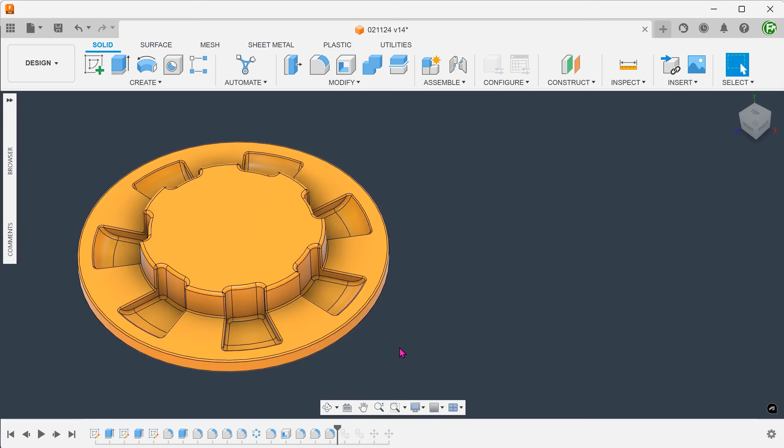Looking at this part, it is quite clear that shelling would play a major role. As always, the first step is to identify the main shape. If we ignore these indentations, this is simply a disc with a cylinder in the middle. So let's start with that.

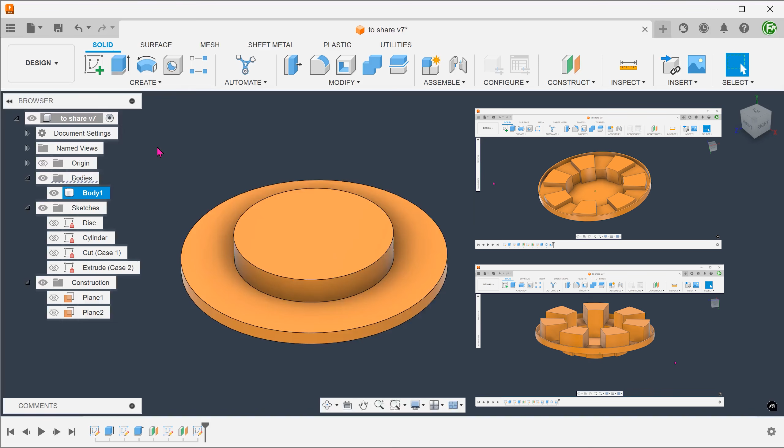For the first example, I'm going to assume that the indentations are flush with the disc. Later, I will discuss another example where they extend beyond the disc. To create the indentations at the top, I have prepared the sketch here.

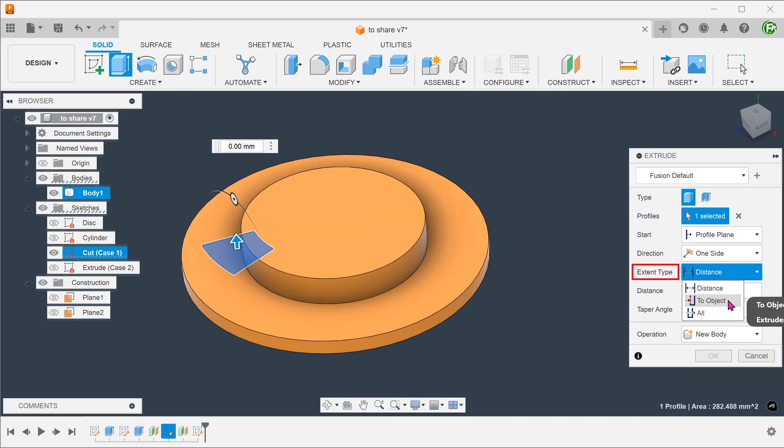Begin the extrude command with this profile. I will be working with a shell thickness of 1mm throughout, so we want to control this cut to be 1mm away from the base. For extent type, select To Object and select the base face. We can introduce an offset from the base by entering a value of -1.

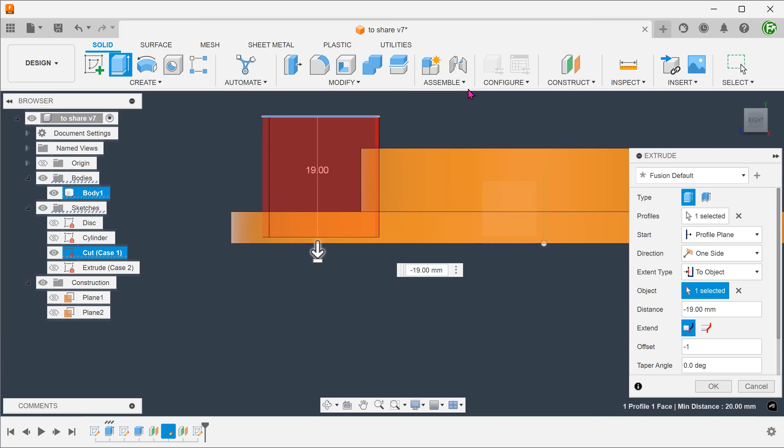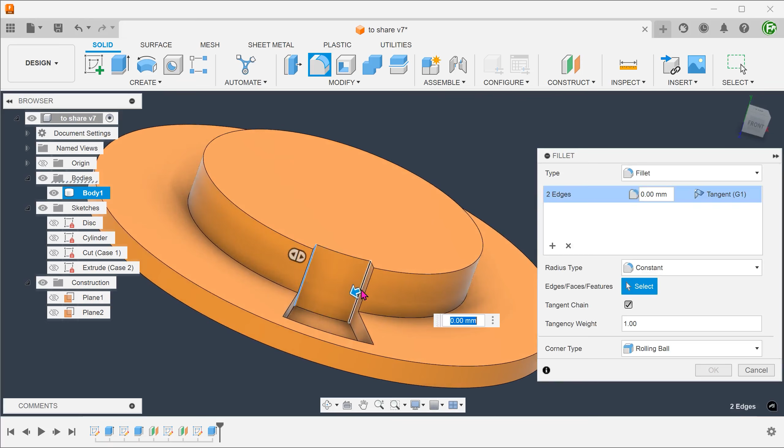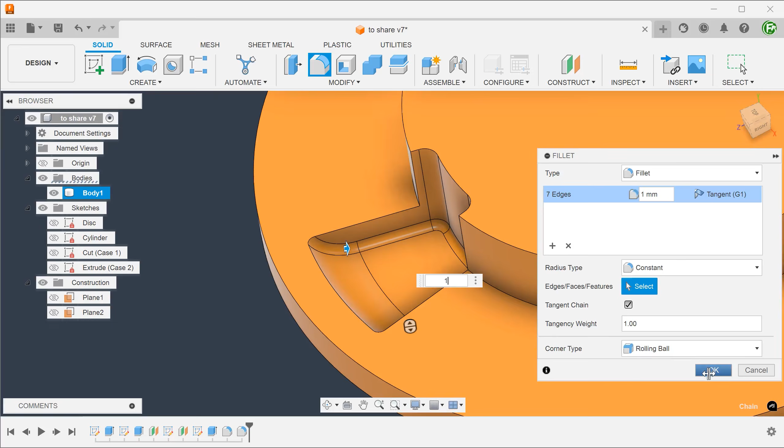Before shelling, we want to add in fillets. With these fillets in place, the shell would automatically adjust the thickness and introduce fillets on the reverse side as well. Go to Modify, Shell. Select the base face. Adjust the thickness.

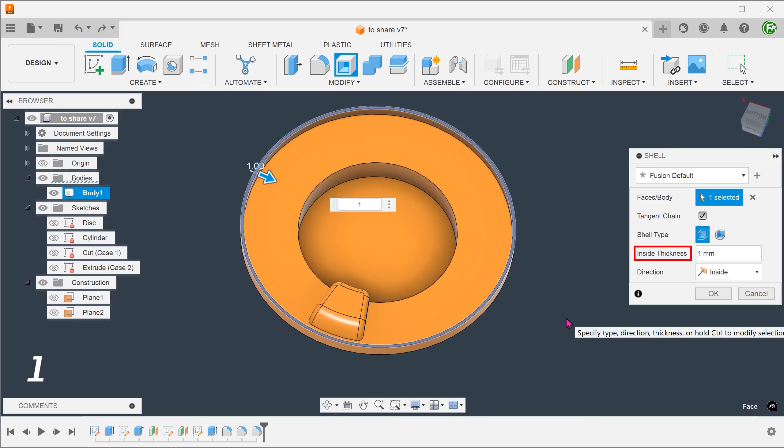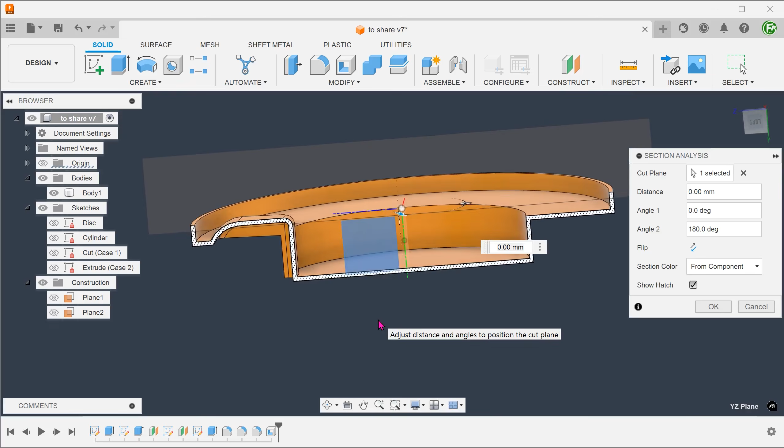So with a simple command, we have created a lip, a protrusion, and a cylindrical cut, all the while maintaining a universal wall thickness of 1mm. At this point, we can split out this portion and pattern bodies. Or we could have also patterned the cut before shelling. I will leave that for you to try. This workflow will be applicable for the case where the indentation is either level with or below the base face.

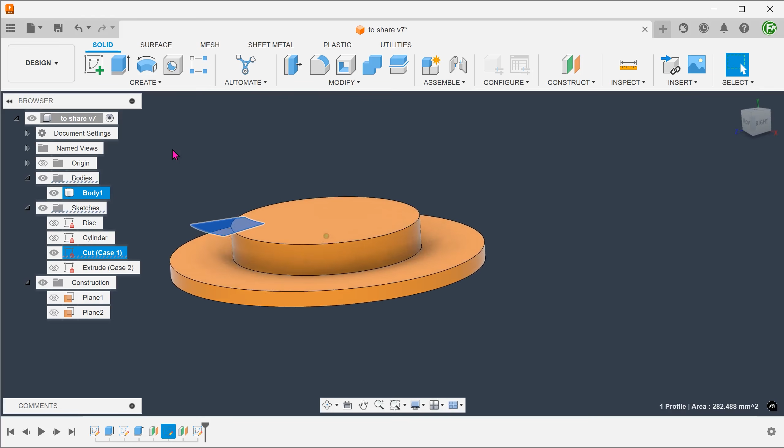Let's take a look at the next example where the indentation exceeds the base face. In this case, it will be very difficult to use the same sketch to make the cut from the top and at the same time build a protrusion at the bottom that extends beyond the base face. For this example, it actually makes more sense to shell the main body first. Go to Modify, Shell. Select the base face and adjust the thickness.

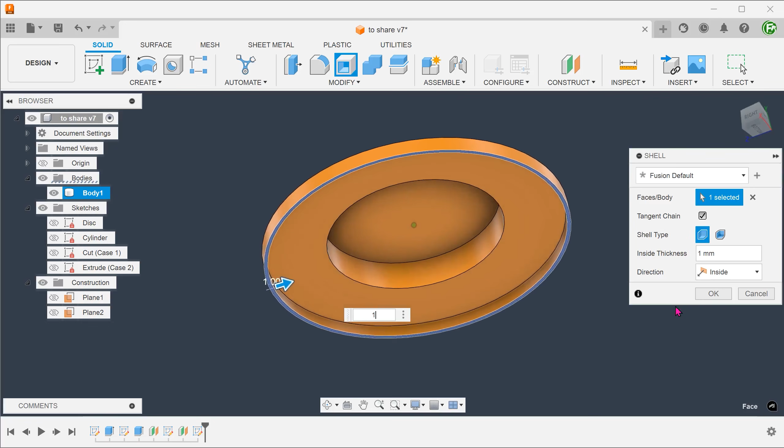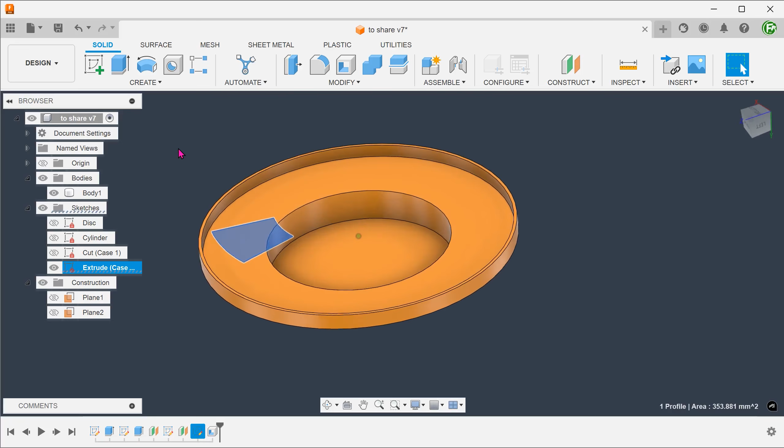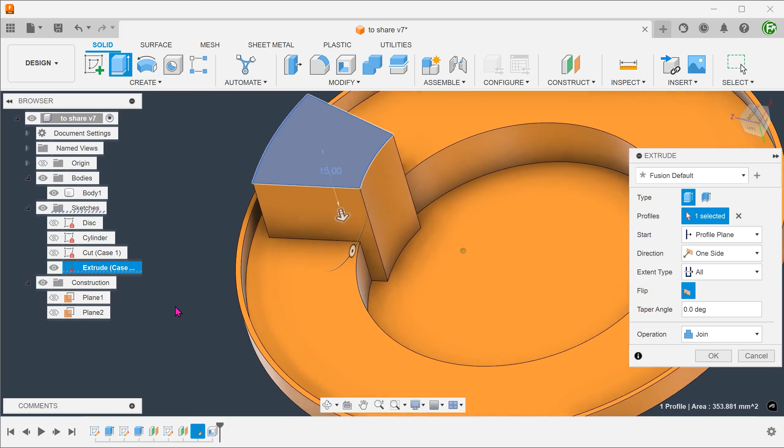I have prepared a sketch here on a plane that is above the base face. Begin the extrude command with this profile. For extent type, set to All. Flip the direction. Set the operation to Join. With extent set to All, the extrude automatically terminates up against any existing faces.

To create the cut at the top, we shall use the shell command. Select these three faces. Adjust the thickness.

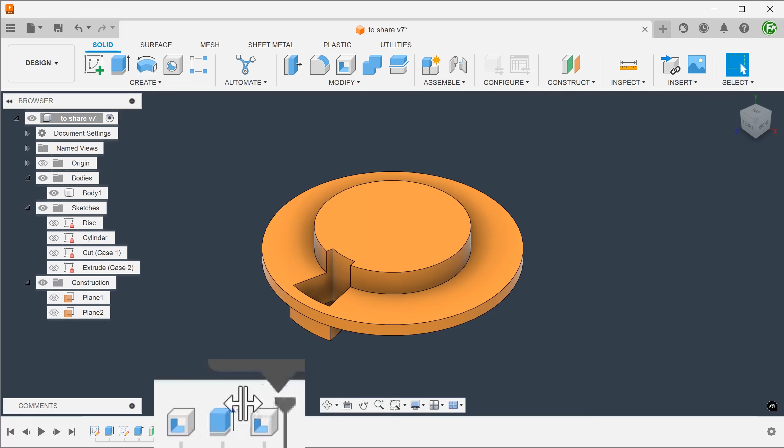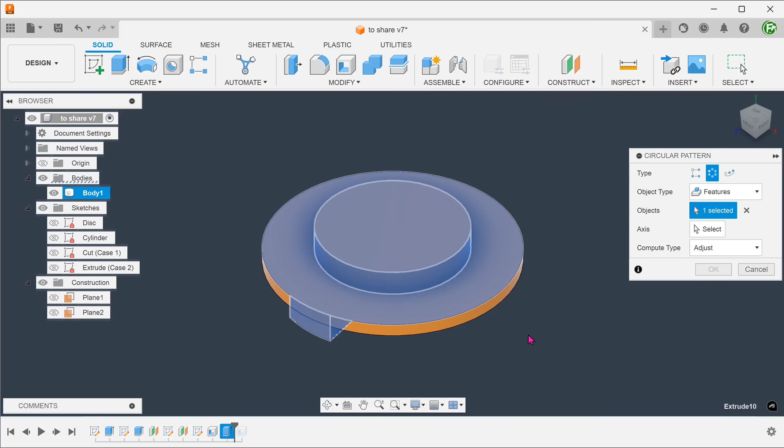Let's roll back to before the shell. Let's try creating a circular pattern for this extrude and see if the shell would regenerate successfully. Roll forward the timeline.